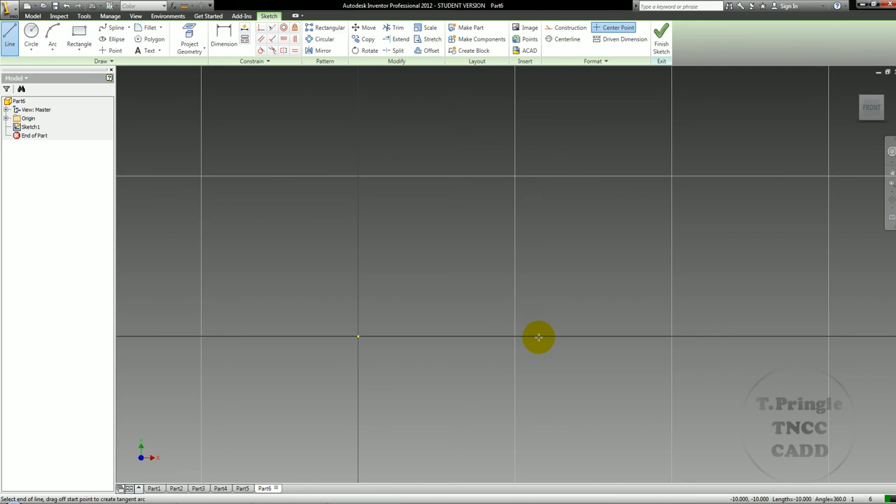For exercise P3-20, I've already started a new metric file. What I'm going to do is begin to draw the overall shape of the front. I know that this segment here is going to go across 90. I'm probably going to have to zoom out a little bit. Actually, that's pretty good.

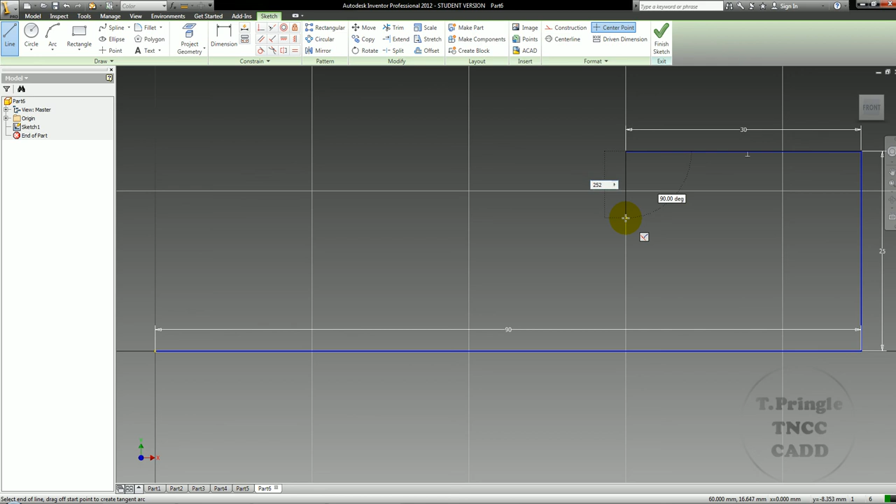This piece here is going to go up 25, over 30, then it goes down 25 minus 12, which is 13. You can type the dimension, or you can type the math equation in, so it doesn't really matter. And it's going to go over another 25.

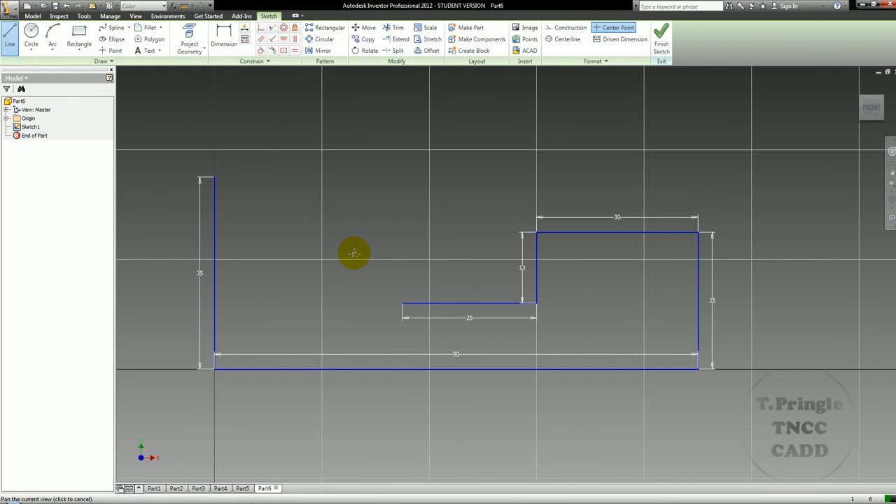I'm going to restart my line command over here. This segment right here is going to go up 35. Now, one thing that's vitally important to keep in mind is that this object is not symmetrical, but we can assume that the heights of these two pieces are the same. So I'm just going to go ahead and put that in right there, and we'll drop this down.

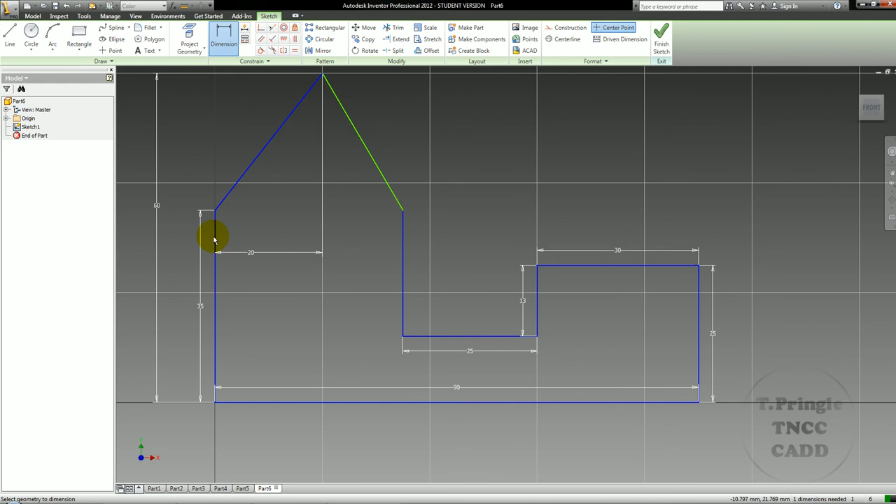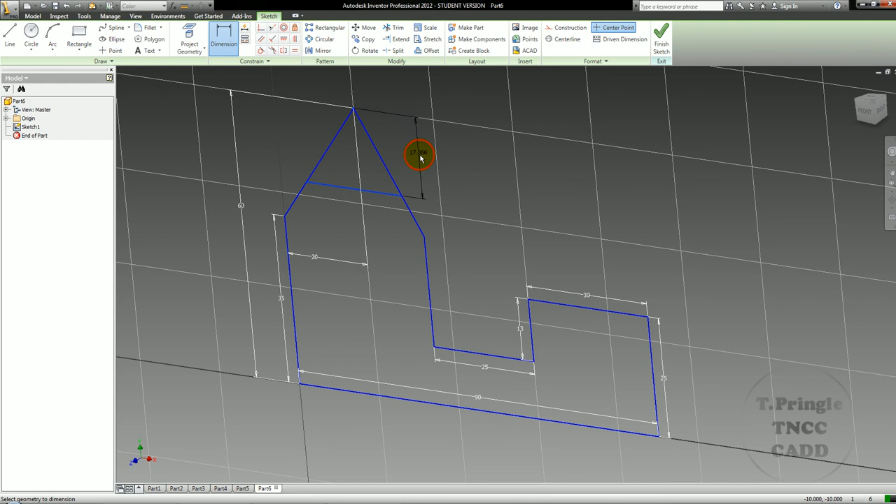Then I can put a horizontal constraint in between this, and what that's going to do is line everything up in a linear fashion. Now, one other thing I'm going to do, just to save myself a little bit of time, is draw a line straight across here and give that a dimension of 18 from the top. So we'll put in that 18 right there, and I'm going to go ahead and finish this sketch.

Now I'm going to extrude both of these profiles using the mid-plane option, 55.

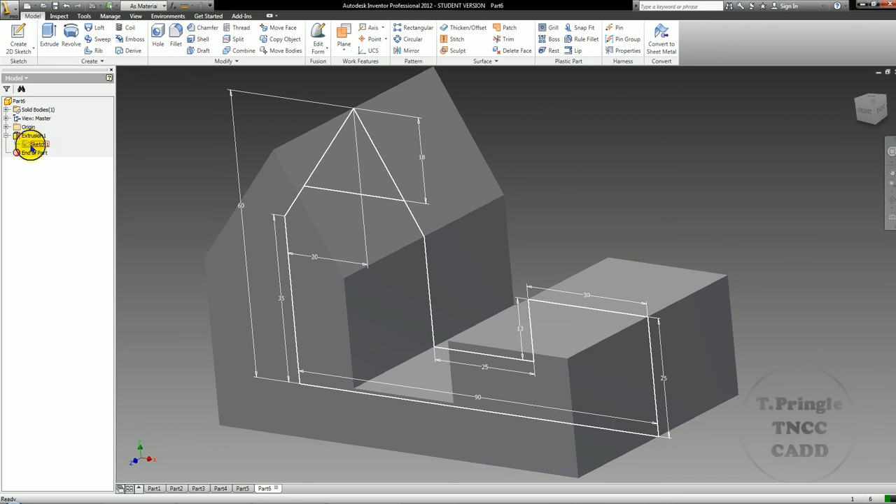Now I'm going to come back in here and share that sketch, extrude again, grabbing that piece right there, but this time I'm going to cut, use mid-plane, and if it's 15 on both sides, then it's 55 minus 15 minus 15.

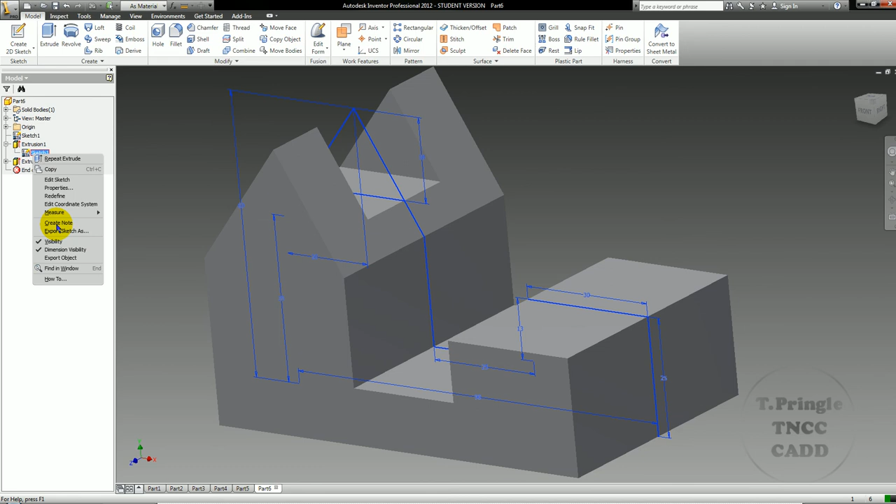And there's that cut. Now I'm going to right click and turn off the visibility of that sketch. Click on this surface, do a new sketch on this face, draw a single line on here, dimensioning it 15 from the back side, and up 5 on this side.

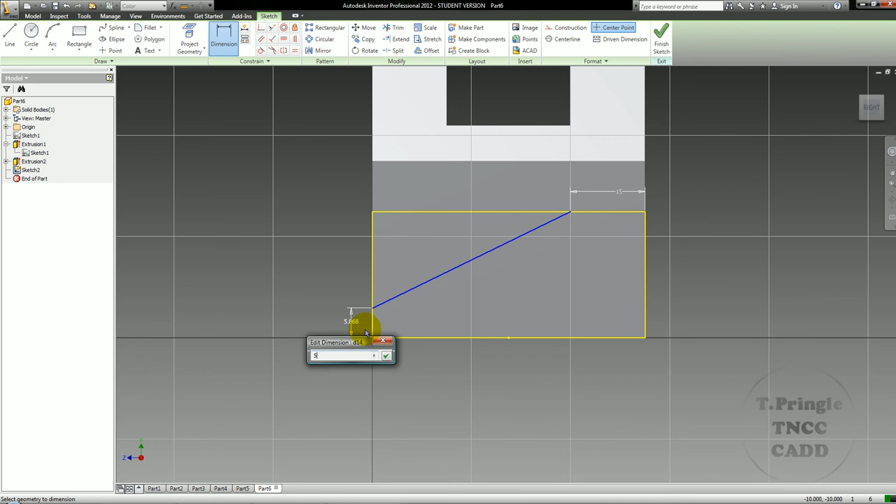We'll go ahead and orbit this thing back around, go to my extrude command, select this profile. I want it to cut 20. Say OK, so there we now have that cutout in place.

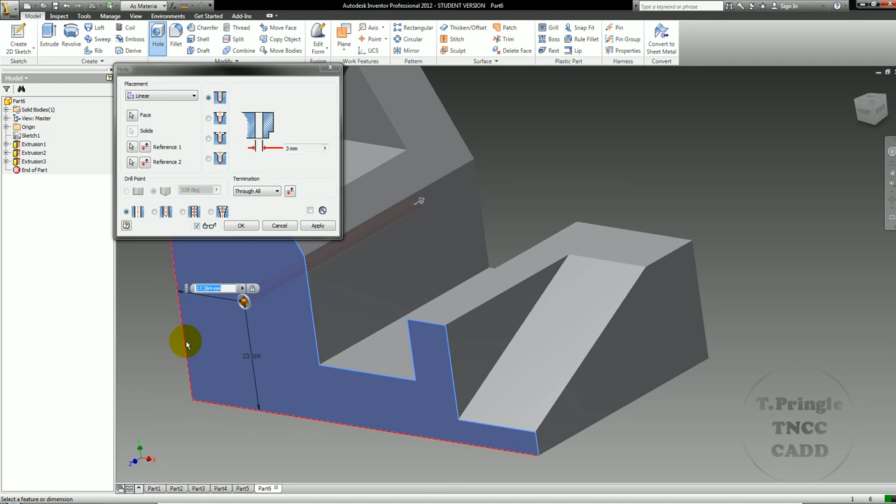Now I can go to the hole command. I want my hole on this face with my two reference edges being there and there, and it's going to be 20 off of that edge. The height of it is also 20, and its diameter is 14. So I can apply that and say OK.

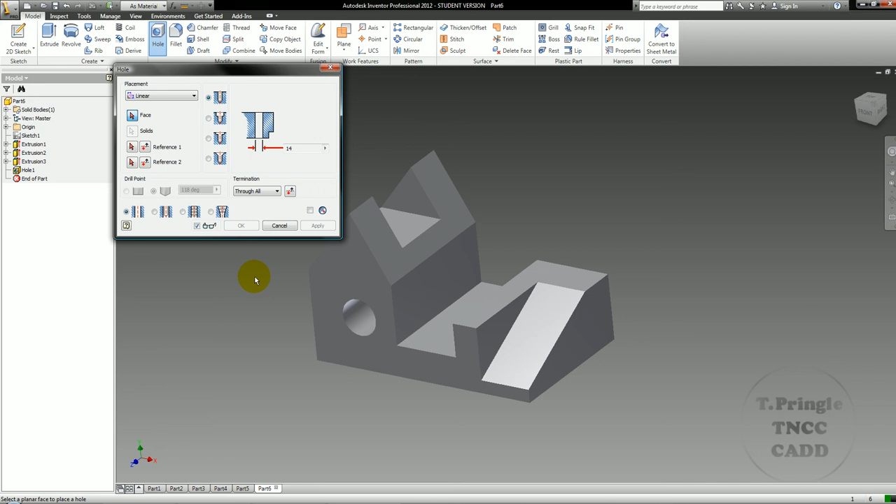And there is exercise P3-20.